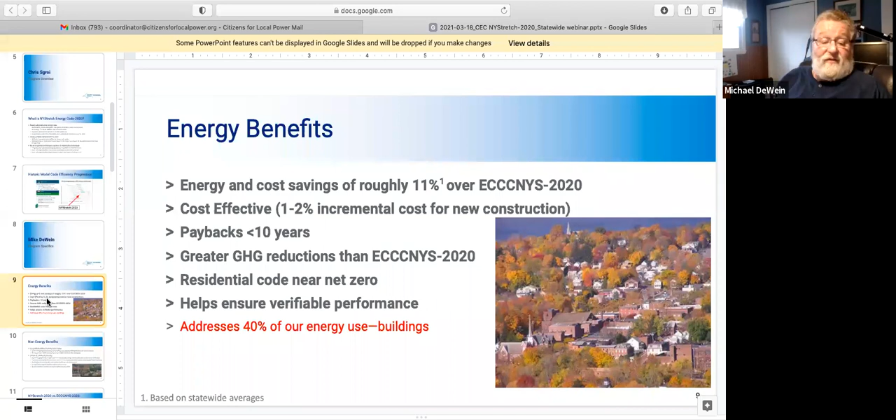And of course, there's lots of non-energy benefits, economic benefits stemming from energy savings themselves, but also from the allied impacts of the code itself. And I like to zero in on those economic impacts, particularly long-term: reduced operating costs, saving money for the residents, for the tenants, for the owners of our building stock. And we know from many, many studies over as long as I've been around, and that's perhaps too long, that money that's spent on energy efficiency in your community stays in your community. It's a known fact.

There's also many climate benefits. There's all sorts of economic opportunity in continuing to develop the industries and the economy for high performance building design and construction, and also performance testing. We also know that better energy codes, better building codes in general, increase community attractiveness. It can even have an impact on insurance rates, as communities are rated for their code efficacy and strength, and that goes to insurance companies for determining rates. And energy is all a part of that.

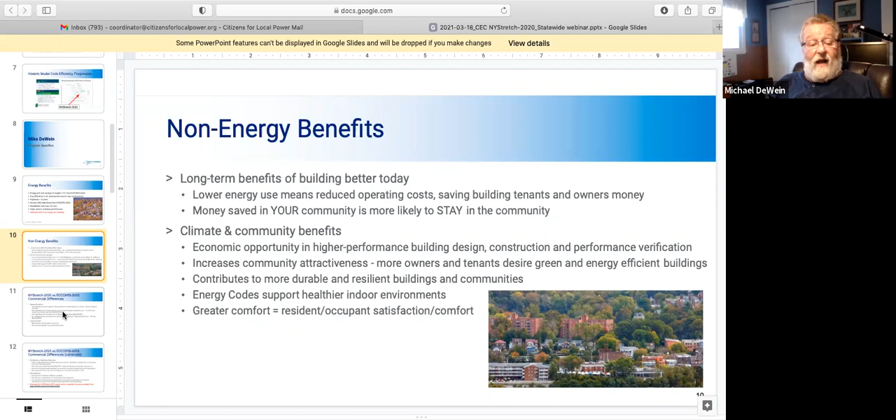And finally, it's important that inhabitants of our buildings, which are shelters to keep the weather out, among other things, those occupants in New York stretch code buildings will be that much more comfortable and happy with their surroundings, as will office and other building occupants. Next slide, please.

What's the difference between the New York stretch and our base 2020 energy code? Well, there have been some improvements to the building enclosure, the building envelope in terms of insulation level, better attention to insulation detail, windows and skylights and such. There are improvements in the building enclosure in the area of air leakage, both for energy use, comfort, and also for building indoor air quality issues too.

And dealing with thermal breaks with the air barrier, with the insulation improvements, are particularly improved in the area of commercial buildings. And in some cases, larger commercial buildings will now need to be blower door tested, like residential homes; all new homes have to be blower door tested.

And this is terrific because it reverses a trend to very poorly detailed and maintained air barriers in commercial buildings from previous codes, where we were told that the building envelope didn't mean as much and air leakage didn't mean as much back in the day. Well, we've learned that that is not true. Now we're working to create more airtight commercial buildings as well, so we can control the environment inside.

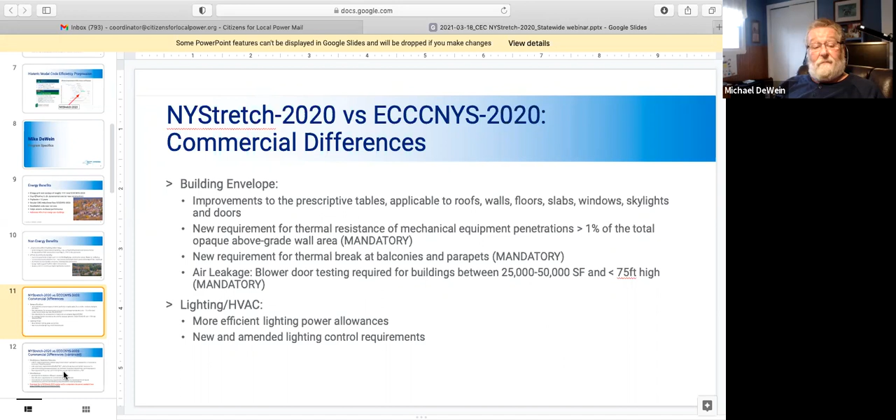On the commercial side, there are some electrification readiness measures. Now, the New York stretch code doesn't require solar photovoltaic or renewables or electric vehicle charging, but it does help deal with some of the soft costs that exist for people in buildings that would like to in the future add solar or add charging stations by making the electrical systems ready for charging spaces and photovoltaics. So that's very key here.

Again, not requiring those new systems, but doing simple wiring and space allocation requirements in order that it's far less expensive to add them after the fact when the building is already existing. And then a number of different power conversion and consumption requirements on the commercial side.

There are additional efficiency packages with some amendments as required in the New York stretch. They were required previously as a base in the existing base energy code, but some changes there to make them a little better. And there's some allowances for commercial kitchen equipment and building commissioning, much of which already exists in the energy code base, but it's being stepped up a little bit to provide much more efficient buildings through just the assurance control that those requirements are being detailed and assembled and installed properly.

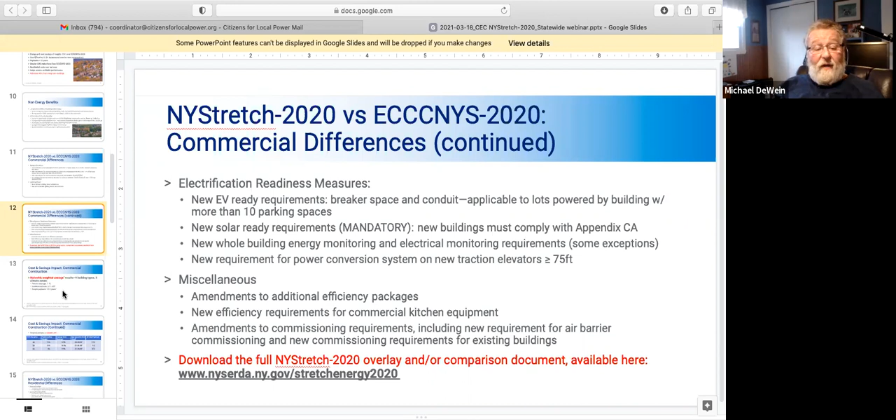Folks ask about the cost effectiveness of this new stretch energy code. The cost effectiveness of codes, and the cost in general of codes and regulation, is always called into question. NYSERDA did a tremendous cost benefit analysis, both the commercial and residential side for new construction, using really the most conservative approach, the prescriptive compliance path method, and simple payback, which is kind of a silly way of looking at energy improvements to buildings, because most of those improvements have lifetimes way beyond their simple payback age, if you will.

So again, statewide, across 9 building types in all 3 climate zones in New York State, we have an average of about 7+% in energy savings. The incremental cost a little over $1 per square foot, and simple payback a little over 10 years. Next slide.

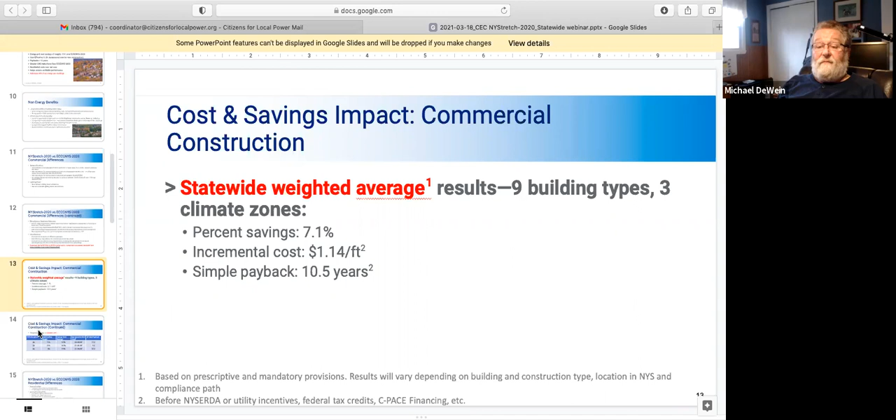And here across all 3 of our climate zones, climate zone 4 being a lot of downstate New York, the counties around New York City and Long Island, 5 being a good part of the upstate area of New York State, and then climate zone 6 being to a large extent the North Country and a few other scattered counties.

That's changing. And again, around 10 years, give or take, for the simple payback, and the incremental costs spread from about $1 to almost $2 a square foot. Next slide.

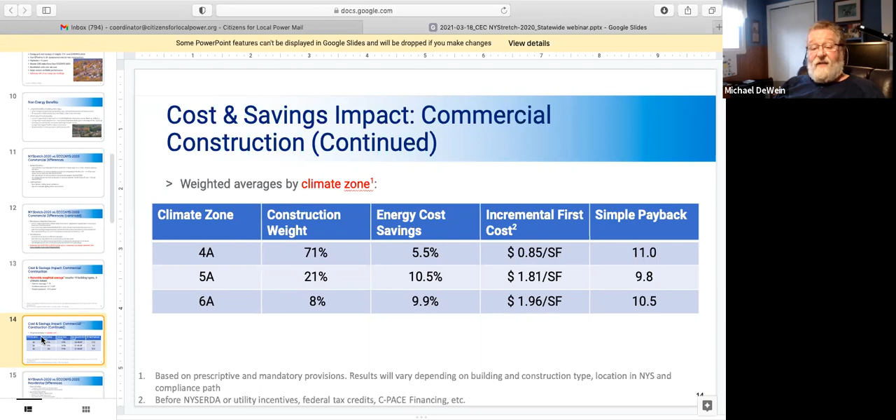And again, just before I forget, that full cost benefit analysis is on the website, which you will see the address for again. It's a great piece of work, and will keep you entertained for hours if you really want to dig into the dollars and cents. Great job by NYSERDA and their consultants there.

On the residential side, the differences particularly involve, again, some building envelope changes, some slightly better requirements for windows. Windows aren't usually much of an issue because the window industry has been very involved in the code changes and are, in most cases, way ahead of the baseline code changes, and many products are at the shelf level that the New York Stretch code is at, but again, moving the market to adopting them.

Here we see more efficient lighting requirements, requirements for duct systems that make sense, that we've been trying to promote at the high performance building level for years, decades. Requirements for proper sizing of duct systems and HVAC systems. Also requirements for solar and electric vehicle ready accommodations for those technologies when the building owner would like to go to them, to lower those front costs.

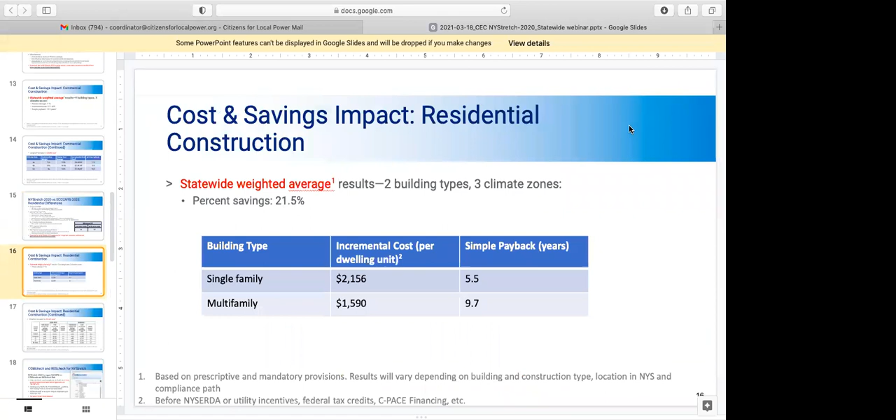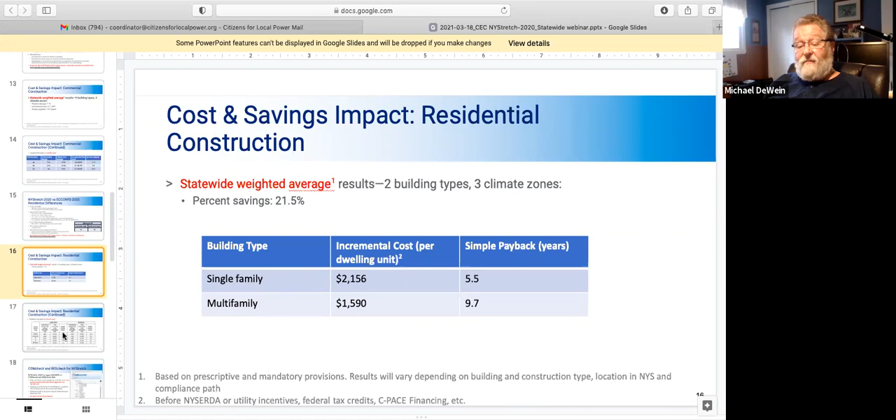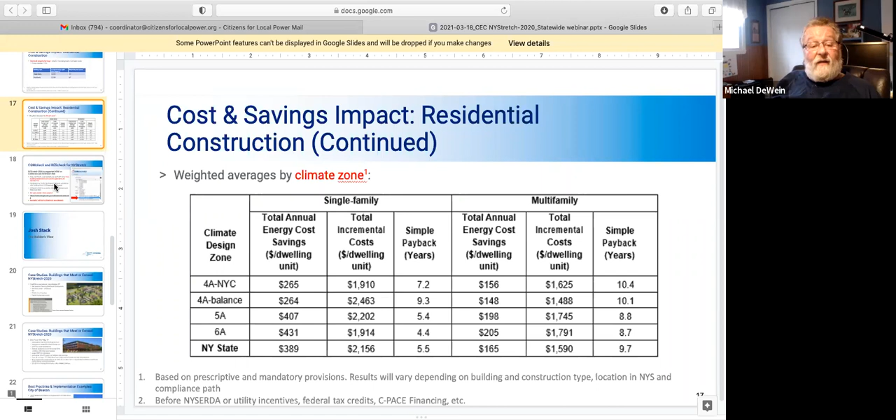Next slide. And as I mentioned, there's tremendous resources available on that New York Stretch website. Two of them, I should say, is that NYSERDA arranged with and underwrote the enhancement of the very often used COMcheck and REScheck compliance tools for designers and builders. It's developed by the U.S. Department of Energy, and I had the pleasure of being involved in the very early days. Great tools that many code officials in New York State require. So these tools and their adaptation and enhancement for New York Stretch will be very much appreciated.

Josh Stack is on deck here. Take it over, Josh. Great, thanks everybody.

So I'd like to provide today a builder's perspective and also a perspective of a third-party verifier who works with municipalities, code officials, and projects to verify above code energy and non-energy performance. And so really, these case studies, I think, illustrate in a very significant and concrete way the energy and non-energy benefits of New York Stretch. Next slide, please.

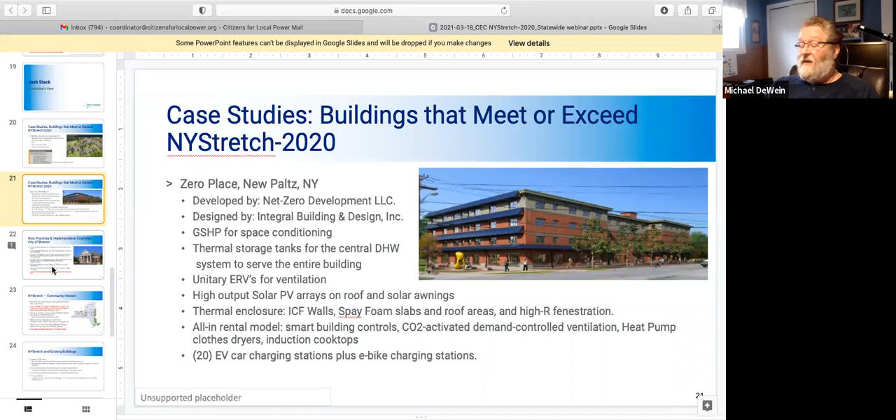Thanks, Josh. It's great to have you on the team with your background as a builder. Next slide, please.

On that, especially on the Passive House and the LEED side, it's really good that New York Stretch is bringing in these high performance building programs where, outside of New York City, New York hasn't gotten hip to and taken advantage of the market advantage of a lot of these programs. So good stuff. And I'm glad you got our back, Josh.

The way that our work with you and your communities generally goes down can be described best by the process that the city of Beacon used and we worked with to adopt. They were our first adopter in New York State, outside of New York City, of course, who kind of has their own version, although based on New York Stretch and almost identical.

But the Clean Energy Community Coordinator down in that region, Hudson Valley HVRC, worked with them to get them on board with the CEC program, and then basically handed off to us when they expressed interest in adopting the New York Stretch, given that it is such a high scoring activity from the standpoint of the CEC. Plus, it's just really the best comprehensive way to address your building energy use in any jurisdiction or community.

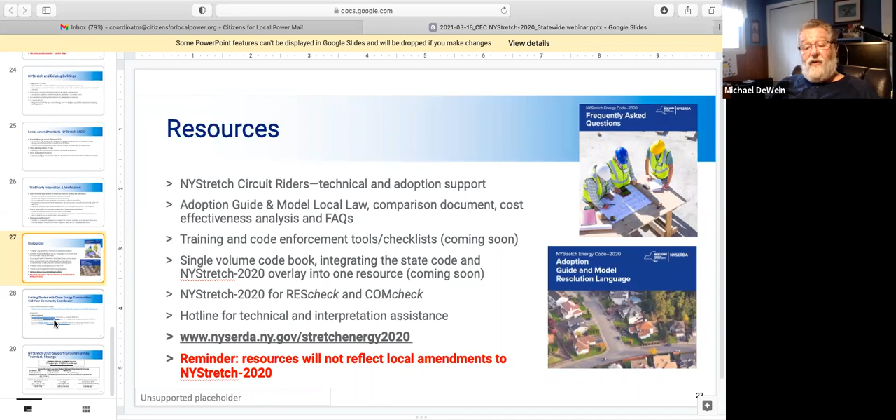changes. This is precisely the reason why NYSERDA invested in the development of a common NYStretch code, so that in response to the opening in Article 11 of the Energy Law, communities could adopt one stretch code and take advantage of those resources. Next slide.

I'm sure that a whole bunch of them are here. And it's good to see you all, even though I can't see you all.

Again, look at the NYStretch website. Also look to the Leadership Round guidance document to continue to understand the potential benefits of the Clean Energy Communities Program in and for your community. There's high impact action toolkits, there's an adoption guide, and again, sample model energy code resolution materials all on that NYStretch site too. Next slide.

Am I still rolling here, or should I? Yes, you are. I do want to encourage you though to let me start asking you questions because we've got some great ones. Okay. All right.